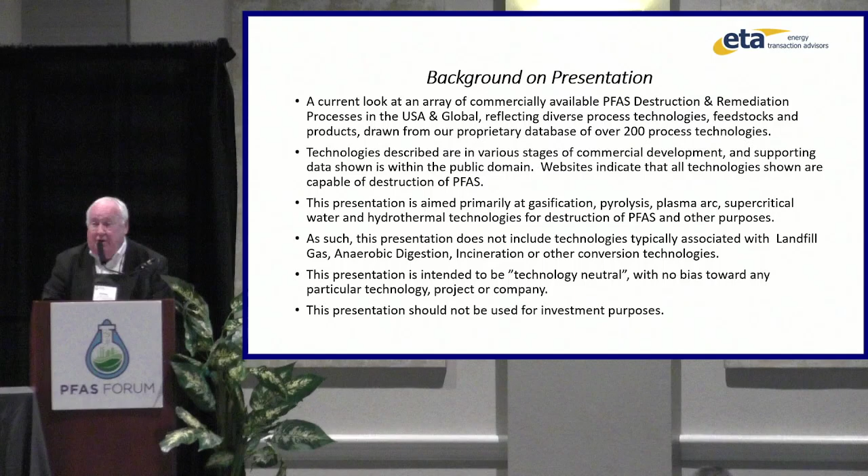Totally unaffected by any differences, and we represent that we are totally objective in our analysis of that. And above all, this presentation should not be used for investment purposes.

ETA is a boutique consultant with a focus currently on waste, biomass, and plastics conversion. Biomass includes things like waste wood and any other plant material, agricultural materials, and ultimately plastics that are typically waste and looking for a disposal method. Effectively, we're focusing on gasification, pyrolysis, and plasma arc. Our key assignments typically are all what I would refer to as due diligence on behalf of either developers or technology suppliers, and we've been very active over the last year in this particular arena.

Just a quick snapshot of the factors globally that are affecting and essentially reshaping the PFAS destruction and remediation marketplace. Without going through all of them, I think you recognize these social, political, and environmental factors, and they represent a component of all the activity tending to push this technology forward. The main one here in the U.S. is recent activity and rulemaking by the Environmental Protection Agency, which I think will have a very profound effect going forward on what happens in this industry.

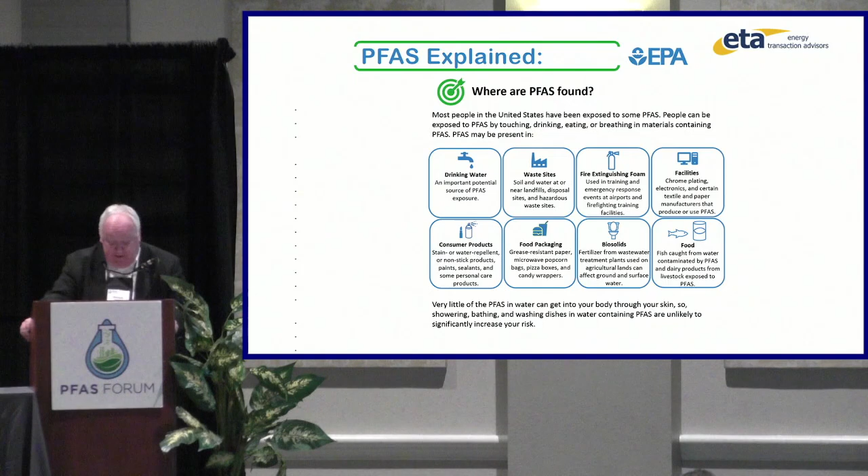And essentially, where are they found? They're found everywhere: air, water, soil, plants, food, industrial plants, packaging, household products, and many others.

And are they safe? I think the clear answer is no, they're not, but the jury is still out in terms of true health consequences.

How did we get into potentially using gasification, pyrolysis, or some of the other technologies rather than the traditional methodology, which is incineration? Most hazardous waste incinerators have operated between 980 and 1200 degrees centigrade, and since the thermal destruction of most organic compounds occurs between 590 and 650 degrees centigrade, I made a simple calculation and said gasification, pyrolysis, whatever, all typically operate well above those ranges, and therefore those technologies should be fully capable of destroying or at least remediating PFAS.

I took a look and developed, from our internal database of over 200 technologies, this list primarily based on the operating temperature of the various technologies. I also looked at the sponsors and participants here offering technologies other than incineration, and they've been added to the list.

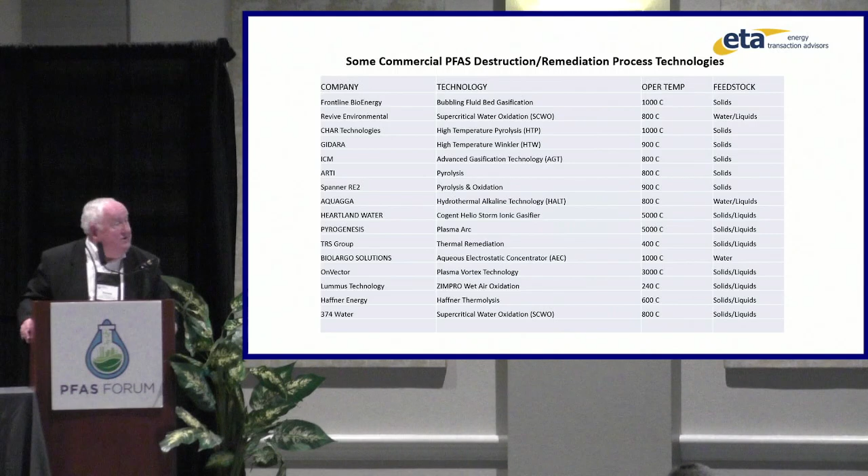Let me say that ETA, Scott, and I are very familiar with about two-thirds of the companies on this list. We talk to them fairly regularly. The other third, as you people in the audience, are relatively new to us, and we'd be happy to expand those relationships, get to know you better, and have you become part of our normal parlance going forward.

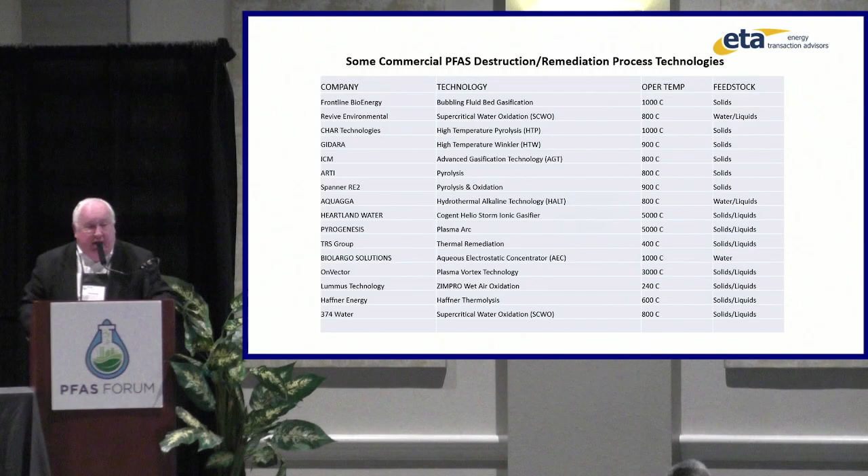At this point, for every technology I've listed, I've got a slide for each, and I'm going to go through those at pretty high speed. You'll be getting a copy of this, so you'll always have an opportunity to do your own research, and I encourage you to do that.

Frontline Bioenergy is basically a fluid bed gasification system, and it has a proprietary gas cleanup system which includes the removal of tars, making them very unique within the gasification space. They have several projects in development, typically large scale, meaning nominally about 1,000 tons a day of feedstock. They're based in Nevada, Iowa.

Virtually all of the gasification and pyrolysis technologies I'm describing have a main purpose that is not to destroy PFAS, but to convert whatever feedstock they're taking into synthesis gas, or syngas, an intermediate vapor that can then be converted into other valuable materials, unlike incineration, which becomes dead-ended at the end of its processing. Gasification and pyrolysis allow you to take syngas and convert it to chemicals like hydrogen, methanol, ammonia, SAF, and also Fischer-Tropsch liquids, allowing you to look at a facility that will not only destroy PFAS but also create a revenue stream depending on what products you're targeting.

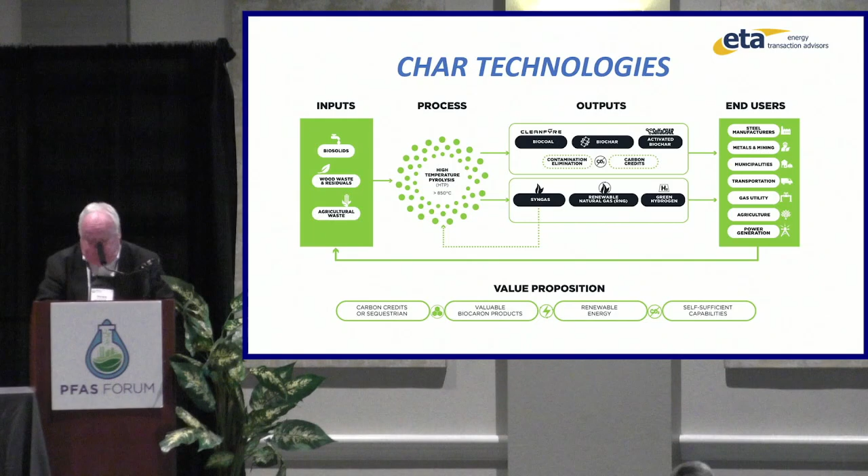GIDARA is high-temperature Winkler. For those of you who've been on the planet for quite a few years, you may remember this technology. It's been around for over 40 years in Germany. It's a bubbling bed, fluid bed, and originally owned by ThyssenKrupp. It was purchased recently, within the last couple of years, by a joint venture of GI Dynamics and ARA Partners. They take solid waste only, headquartered in Atlanta, Georgia, and typically their plants are nominally 1,000 tons a day or larger.

ICM, based in Colwich, Kansas, Advanced Gasification Technology, acronym AGT. They have a portfolio of commercial projects operating typically on waste wood or agricultural waste, and essentially do solid waste conversion, but their operating characteristics suggest they should be able to destroy PFAS. Their plant size is a little lower than many, nominally about 250 tons a day of feedstock as their sweet spot.

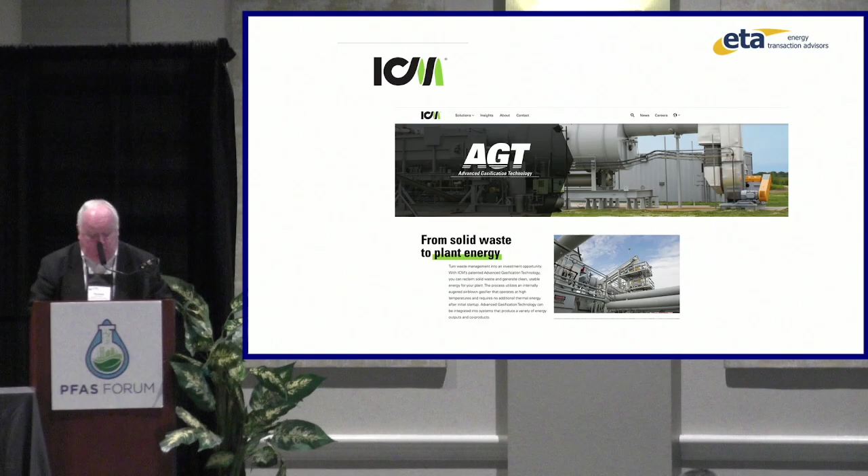ARTI, based in Des Moines, Iowa. It's essentially a pyrolysis system designed primarily to maximize the production of biochar. Biochar is a very popular product now in the marketplace. It has special attributes good for the agricultural industry and mostly for home gardeners. You'll see that industry grow, I think, in the near term. They have a modular system that can fit on a rail car, and they'll deliver it to the site. It's small scale, generally in the range of 5 to 10 tons a day, and they replicate trains to match up with larger sizes.

In Germany, Spanner RE2 offers a biomass power plant. That's all their units do. They do produce a syngas, but it's of a quality only suitable for power generation. Here again, they offer modular units only and solids only.

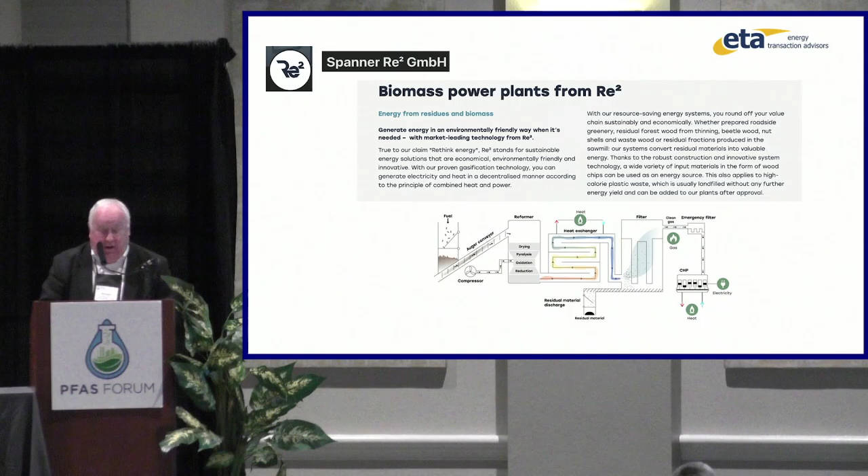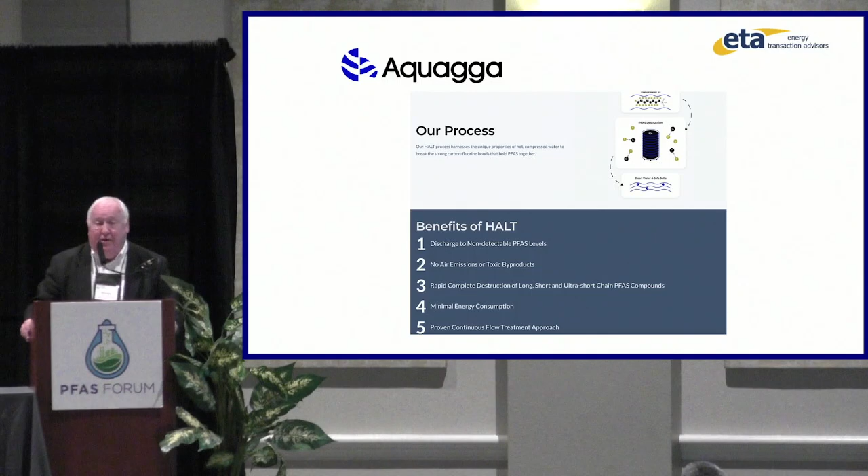This is a new company I'm not familiar with, Aquagga, I believe - forgive me if I'm not pronouncing it right. They're based in Tacoma, Washington. They offer a hydrothermal alkaline technology, HALT process. It appears suitable for liquids only, and I don't know much more about them. If they're in the audience here, I'd be more than happy at some point to learn more about you.

Heartland Water Technology, based in Murfreesboro, Tennessee - their main business is water treatment of all kinds. They have the Helio Storm ultra-high temperature ionic gasifier, and they offer treatment of both solids and liquids.

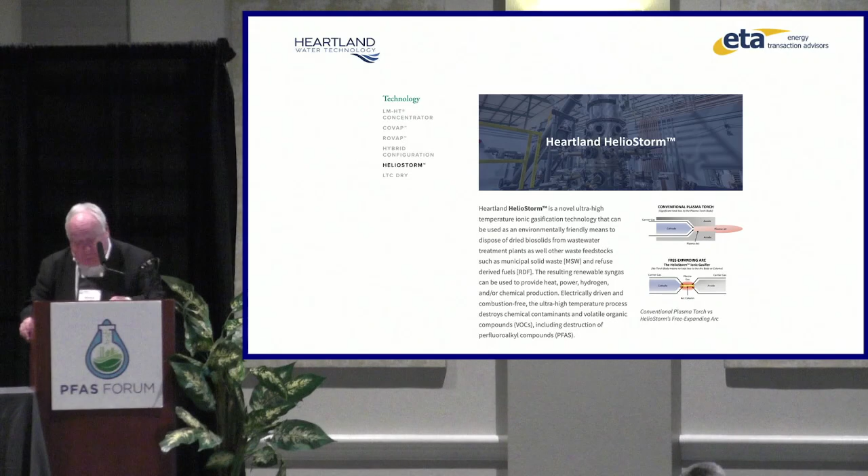PyroGenesis, based in Quebec, Canada, offers a plasma resource recovery system, acronym PRRS, and they have a full system from feed prep, gasification, and vitrification, syngas cleaning, and energy generation. Again, they look at handling both solids and liquids.

TRS Group in Longview, Washington offers thermal remediation and PFAS removal. They offer basically treatment of soils and water.

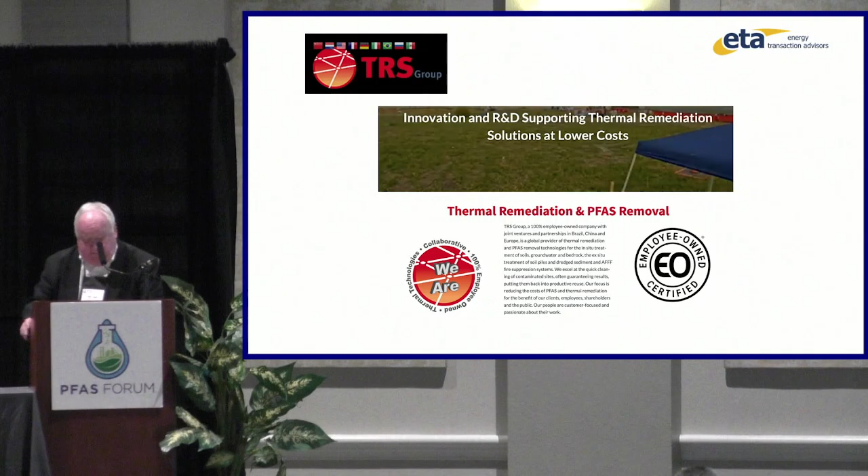BioLargo - I think these folks are here at the conference, I haven't met them yet - but they are based in Westminster, California, and are comprised of a group of several clean tech specialty companies. They offer in this arena the aqueous electrostatic concentrator, which can handle both soil and liquids.

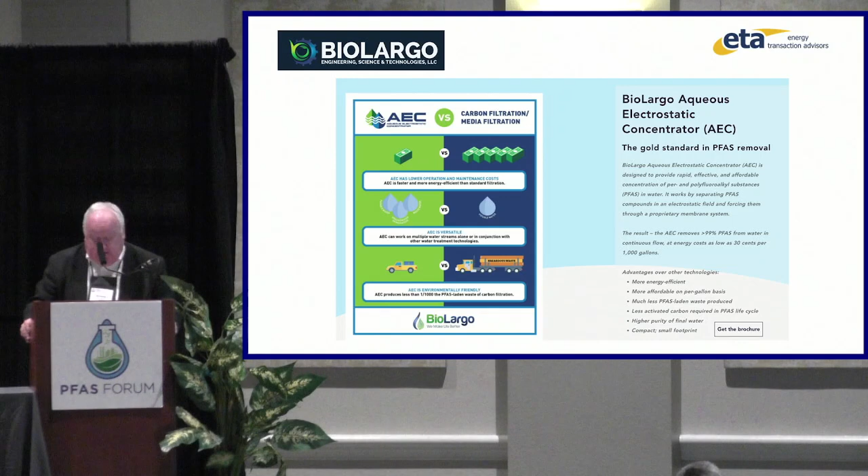Lummus Technology, based in Houston, Texas, my old alma mater years ago. They have a large portfolio of process technologies related to the refining and petrochemical business, and recently purchased the Zimpro wet air oxidation technology, which will take wastewater and other liquids and upgrade them accordingly, and it appears they can handle PFAS as well.

374 Water, based in Durham, North Carolina, uses the air supercritical water oxidation process, and again, they were aimed specifically at wastewater treatment, and that includes PFAS.

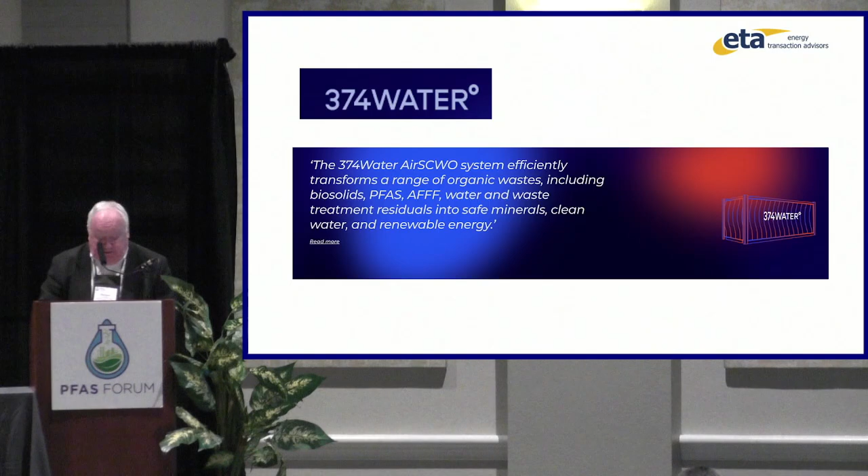And then finally, just to remind you who we are - our main chore in this industry for the last year and a half has been due diligence, and it keeps us very busy, and along the way we learn a lot. I think what distinguishes us is we're very granular in what we do, despite the rather simplistic presentation I've made you with regard to these technologies.

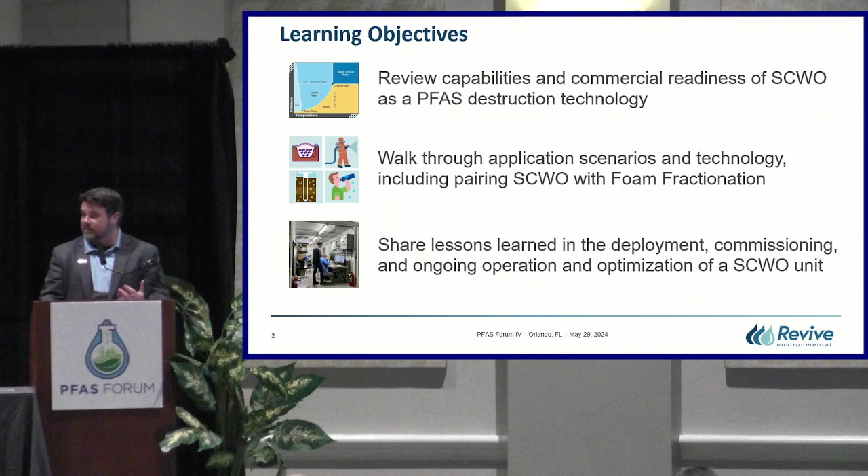Revive Environmental, I was thinking I would have to explain who Battelle is, but there's been good talk about Battelle already. We are actually a spin-out of Battelle. About 10 years ago, Battelle got big into PFAS. They still have many parts of this platform they developed, but one pillar was destruction. Once they got those technologies to the point that they were ready to be commercialized, good on Battelle, they said, that's not what we do well. Let's bring in dollars, form a separate entity, and have a company focused on commercialization.

So we were formed at the end of 2022, and in March of '23, we commercialized our first unit. Now we've got 7 units total, and we have 2 facilities. So really a good model. And we have the added benefit of, Steve Rosansky's in the audience, one of my colleagues from Battelle, we get to reach back and use that expertise that was there developing the technology as we try to further advance it, and do this in a commercial atmosphere.

They said to be patient as you click it. Is it embedded video? Nope, no video. Let me see. Boop.

So I won't spend a lot of time teeing up the PFAS issue. The one piece I'd focus on here is just the persistence, right? We keep putting more and more into the environment. It's staying there. We're looking at destruction as a means to try to break part of that cycle.

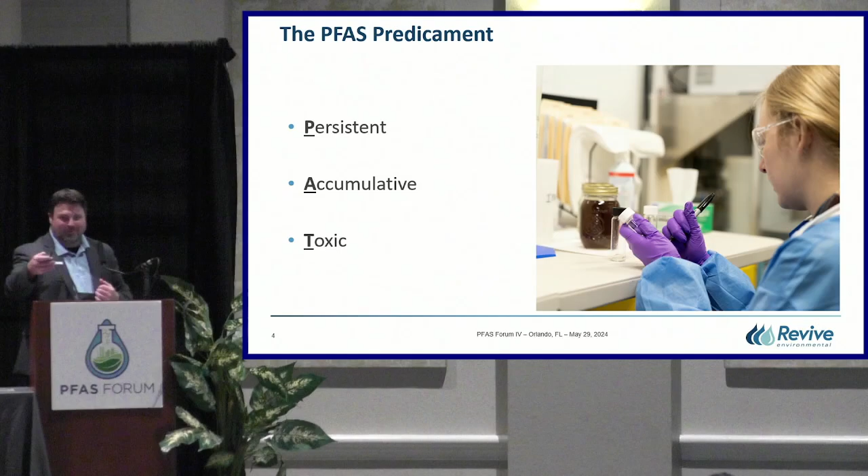Just to bear with me with these clicks. Okay. There

You hear so much about it, like today, about how overwhelming this is. Wherever you look, you're going to find it. And so this feels like a problem where you almost wonder, what's the sense of us addressing this? If all we're going to do is take PFAS out of water or out of waste and put it somewhere else, it's right to feel like that. But this is where we see PFAS destruction playing a role.

We know that the goals we have to get to are really, really daunting. You've heard plenty of folks walk you through what these requirements are. I'd like to talk you through some of the math. If we look at something like AFFF, aqueous film forming foam, these firefighting foams, there's a lot of PFAS in there. Very, very high concentrations. You could be in the millions of parts per trillion. So the math is, how do you go from millions of parts per trillion down to single digits or non-detect? You need a lot of destruction, 6 nines of destruction. As you look at technologies and the applications where you're looking to use them, you do need to ask that question, what is that target that I'm aiming for?

What's my starting position? And what does that technology need to be able to do to get me where I need to be? There's another aspect you'll look at there, for which PFAS, right? We've talked about 15,000 different PFAS, and we know which ones are regulated today. So how does it do it for what you're targeting? And, preview, I'll be talking about how SCWO actually does achieve that level.

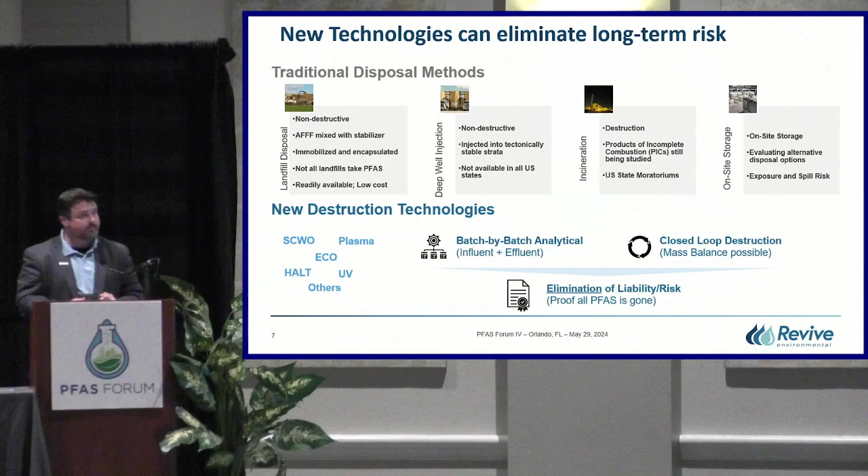So, supercritical water oxidation. In short, you may have always heard of 3 phases of matter. I think there's really like 7, but we say the 4th state of matter is the supercritical. At very high temperatures, very high pressures, water acts different.

What's important for us in this state is that all the organics in that water, including PFAS, are going to be fully dissolved. And as they're fully dissolved, when we introduce our oxygen source, in our case hydrogen peroxide, we're able to get that mineralization reaction to take place.

It ends up being pretty simple in terms of what comes out the other end: a lot of clean water. I'll talk to you about how we've deployed this commercially, how we permitted it. Many of our permit standards are drinking water standards, so we process wastewater and push out water that complies with drinking water standards.

And then we have salts like sodium fluoride in your toothpaste and water, and then a nominal amount of CO2. That's all that comes from the process, and what I'll share with you is just how complete this is.

You may say, well, what about some of the long PFAS? They turn to short, et cetera. The short answer is no. We're doing that for all PFAS, and we're getting that level of up to 6 nines of destruction, so getting us to the non-detect.

So when we heard about the EPA's guidance on destruction, someone said earlier that there wasn't a lot new in it about destruction. There was something new in there. It was a framework for clients and others to really evaluate destruction technologies, because there are so many out there, it's confusing. The EPA laid out these 6 criteria, and we were very happy to see that we had already got all those criteria checked off since we had launched this product.

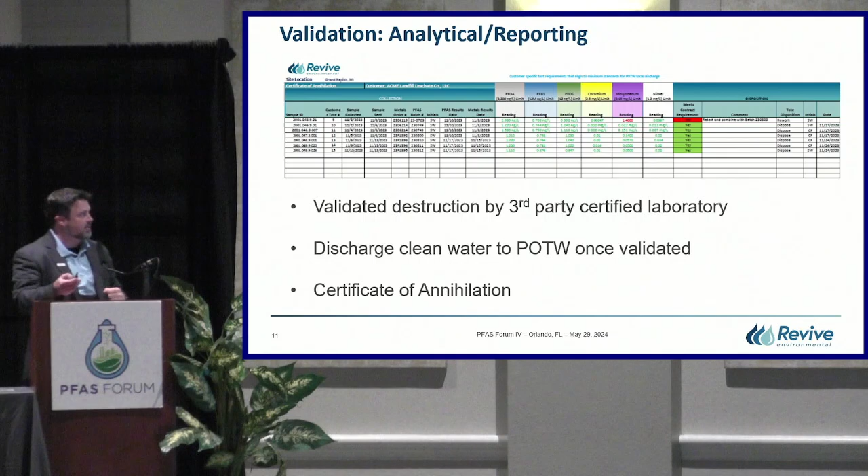Our setup here right now in terms of applications is landfill leachate. Very common - we're having a lot of landfills reach out to us, and there are landfills being pushed by their POTWs saying you better come up with a plan, you can't send us any more PFAS. They're working with us. Industrial wastewater - there's different companies who, whether intentionally or incidentally, have PFAS in their wastewater and want treatment there. AFFF we talked about, and groundwater is an area we're starting to get into.

The big thing to call out here is there's really two modes in which we operate. If we're dealing with a dilute waste stream - and for a lot of these destruction technologies there will be a similar paradigm -

we will concentrate it. So foam fractionation is a popular way to concentrate, GAC is a way to do that. We actually have a technology called GAC Renew, also from Battelle, that pulls PFAS off of the GAC while it's still in the tank, to give something concentrated to put through our system. For the foams, there's so much PFAS you don't need to concentrate it, so we can throw that directly into our system. So dilute waste streams we concentrate, others that are not dilute we process directly.

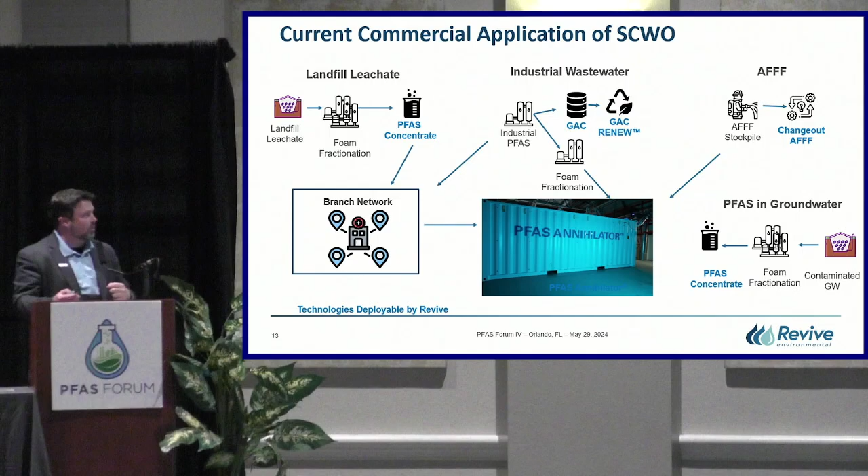As I shared, we've been doing this since March of '23. Last year we treated 55 million gallons of these different types of liquids, and all of that has been verified as meeting discharge requirements when we do that.

We've been establishing facilities - we've now got one in Columbus, Ohio, with 3 of our PFAS annihilators there. It's fully permitted with the state, so Ohio's thrilled they can send their foam there and have it destroyed in-state. We also have a facility in Michigan, and as I'll show, we plan on having others in other areas. We do deploy these as needed to customer sites.

I'll put the caveat that while I like you to think mobile, this isn't us driving to one site this week and another site next week. If you're going to put it there, you're wanting to think about this being probably months worth of time that it's at a site if you really need it there on a temporary basis.

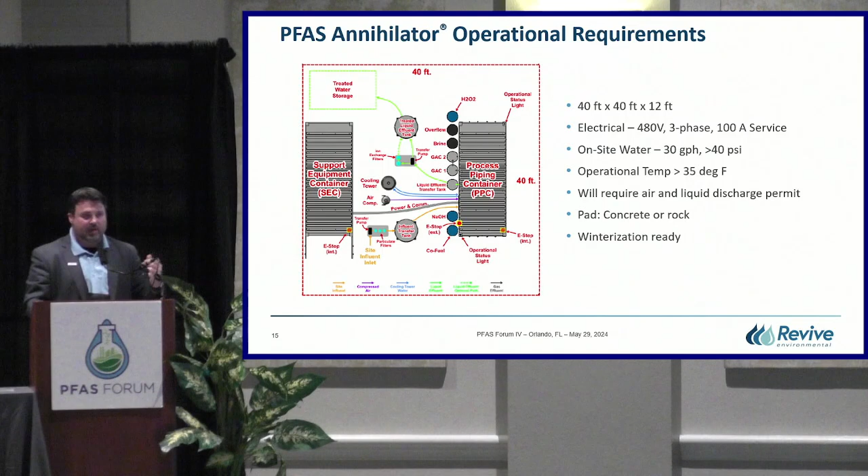What's important to call out is, again, we take dirty water in, and when the clean comes out, we measure that. So once the clean water is coming out of that right-hand trailer, the PPC, that's when we're taking our samples to do our analytical validation. After that point, it goes through some fail stops of GAC and IX for metals. We also have vapor, where we hardly get any vapor - we need to put a vacuum on it. We have air permits by exemption, but still we have a vapor GAC on that. So we ensure that nothing is getting into the environment from this, and we're doing that validation every time before we do a discharge.

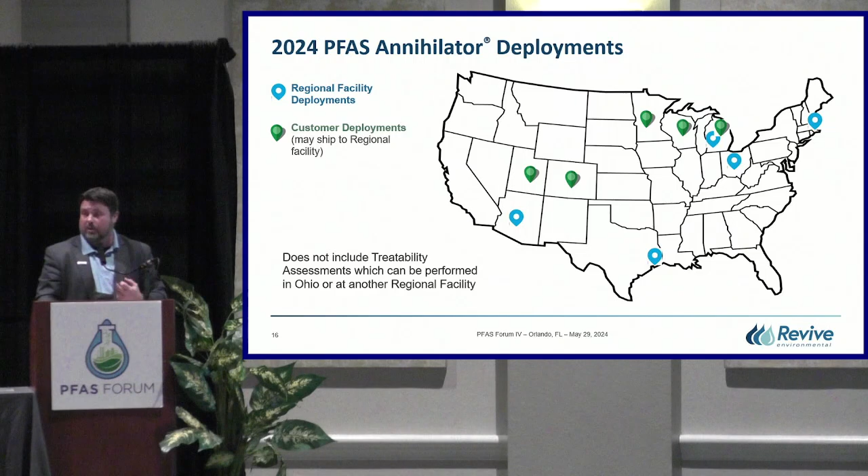So we're expanding these to basically have it close to our customers. Many of the folks we're working with, particularly with these concentration technologies I'll talk about, just don't have enough volume to fill up one of these units. So we look at how we might concentrate on their site and then bring it to us centrally. But we know there are other customers who will not want to put their waste on the road - maybe they have concerns about that, or they have a large enough recurring need for us to deploy to their site.

So I don't think foam fractionation was talked about so far today. I'm curious, how many of you know what that is? Okay, good number. For those who don't, think about an aquarium with fish that bubbled up. The bubbles weren't so much about air for the fish, it was actually helping keep it clean. Some of the organics in that water would stick to the bubbles, since there's a hydrophilic and hydrophobic end, they stick to those bubbles and come up.

Fortunately, that's exactly what PFAS do. They're able to stick to these bubbles, those bubbles go up and form a foam, and the key to it is how do you then take that foam and make it smaller and smaller. So you're able to discharge clean water from this system but have a really concentrated waste at the end.

I will say this has limitations though. What we've seen is that with really short or ultra short chain PFAS, they do not stick to the bubbles as easily. There are ways different vendors are getting around that, like different additives they can put in to help with that collection, or different ways to run parameters or other treatment equipment to bring in with that. But if you have a client with a very high, for instance, PFBS problem, this may provide somewhat of a solution, but you may have to look to other technologies to help out.

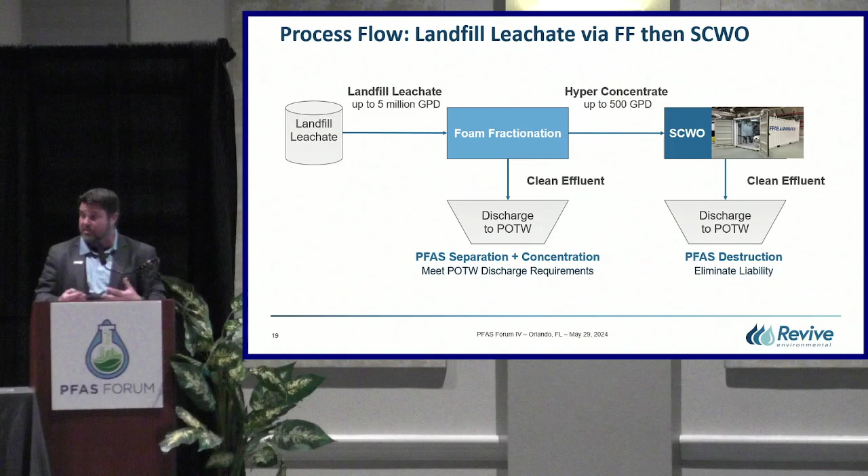And when I show you more about AFFF, the firefighting foams, you'll see very similar results.

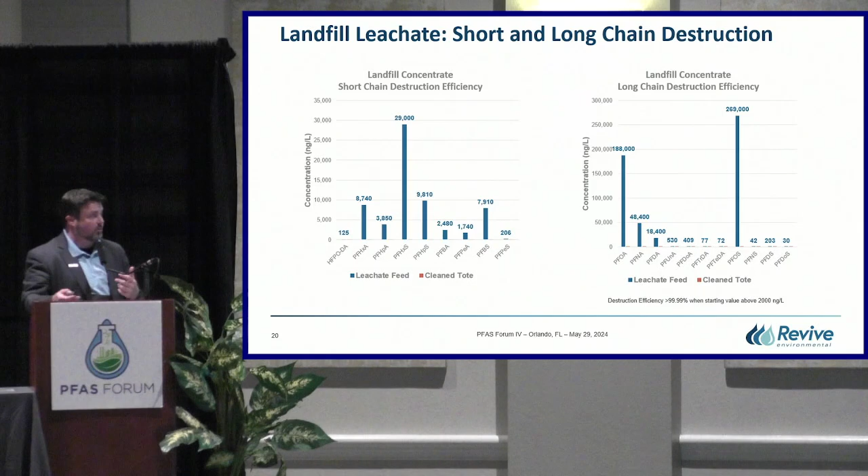There was a little bit of discussion today about that transition to fluorine-free. I tell you, that's probably where a lot of our business is coming from today. We certainly have a lot of landfills and industrial customers, but it's really been a lot of airports and states who are saying, we want to get out of this stuff, let's transition. Not everybody's ready to do that, but there's been a very strong demand to do so.

As they're thinking about that transition, a huge part of it is, what do I do with my waste? Whether the waste is the AFFF still in my closet, the rinse water from cleaning out my system, or maybe an entire system where I want to just start new and throw this one away. They have to really keep that in mind to be efficient.

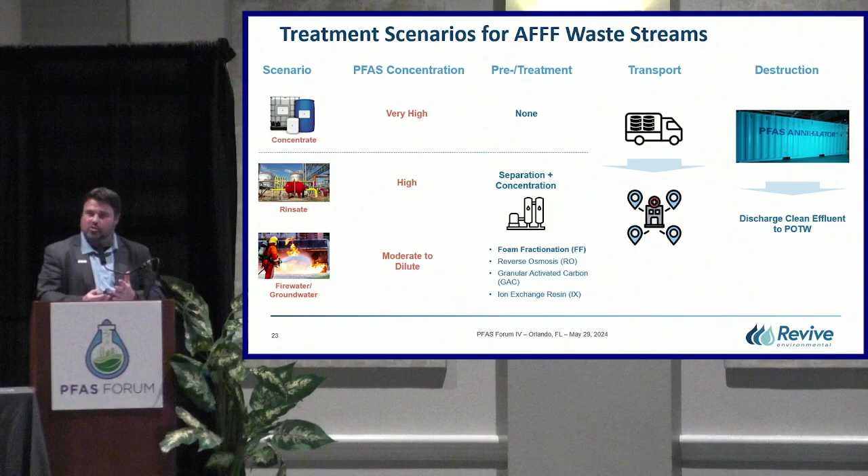What we've seen is either we're getting something very concentrated, like these foams, and for us that's very straightforward, we just put it through our annihilator and destroy it. We actually have t-shirts that say, I love annihilating AFFF, because it almost works like a lubricant for the machines, very good. But then we have these dilute waste streams as well, where it's really the same idea, we just want to concentrate them, foam frac or something else, and get a concentrated waste stream to go in.

So really, lessons learned here. First and foremost, we at Revive operate these units as a service. We don't sell units and tell clients, here's how you need to learn to use this, etc. There are some destruction technologies that do that, but ours is about a service.

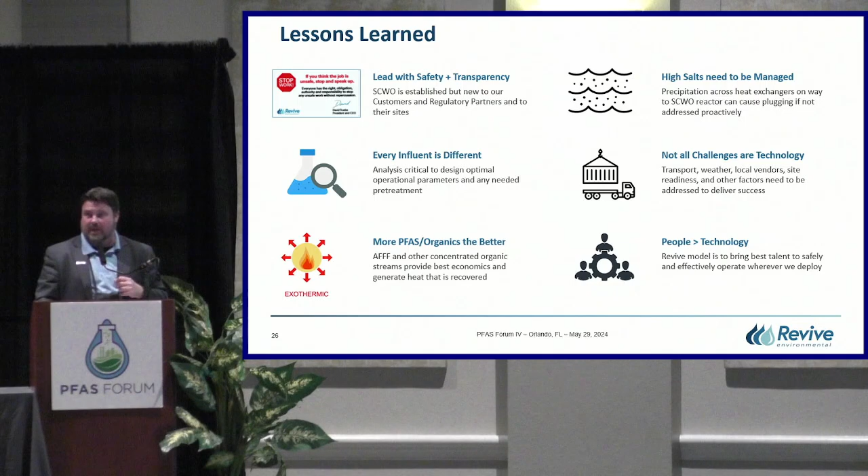Those are kind of things you get to experience as you're doing that. We're building a recipe book, and we're finding out how to best operate in different situations.

Hopefully I've been able to share with you a specific PFAS destruction technology that is ready today and how that matches up with other technologies. For any of the destruction technologies you're looking at, try to figure out what makes that technology most economical. For many of them, it probably will be concentrating.

And really what we've learned in running these sites, we're not doing pilots, we're not doing trials, we are doing this commercially, seeing that so many wastes are different, and that really does have an impact on what we can do. So we're very much having to learn as we go through each one, how we can efficiently destroy, and then how we can achieve the results that our client wants.

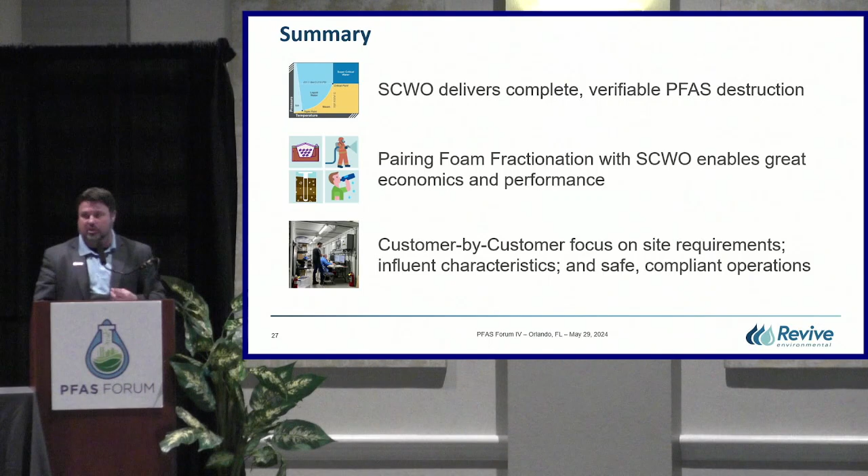All right, thank you, Trevor. So it's a little mind-boggling that in a few years we went from parts per million to parts per trillion, and we're like, oh, six orders of magnitude reduction, no problem, we got this.

It's kind of blowing my mind, but our next presenter is a former colleague of mine at REGENESIS, and I didn't even have to ask this fun fact. She is quite the equestrian. She learned how to ride as an adult and competes now some, right? And wins some, maybe, once in a while? Okay, once in a while. So Maureen Dooley is going to take us from the surface to the subsurface. Great, thanks.

Hi, how's everybody doing? We're getting there. We're so close, so close to happy hour. But yes, I had the opportunity to work with Chad for a number of years. Fantastic person, fantastic scientist, presenter. So anyway, I appreciate it, thank you, Chad.

So, PFAS remediation. One thing I found really interesting today is that we've had this thread of airports running through the entire presentation. We had AFFF transitions, talking about liability, talking about funding, getting into forensics, really interesting data analysis, and I think our friends at the airports have some issues that they need to deal with.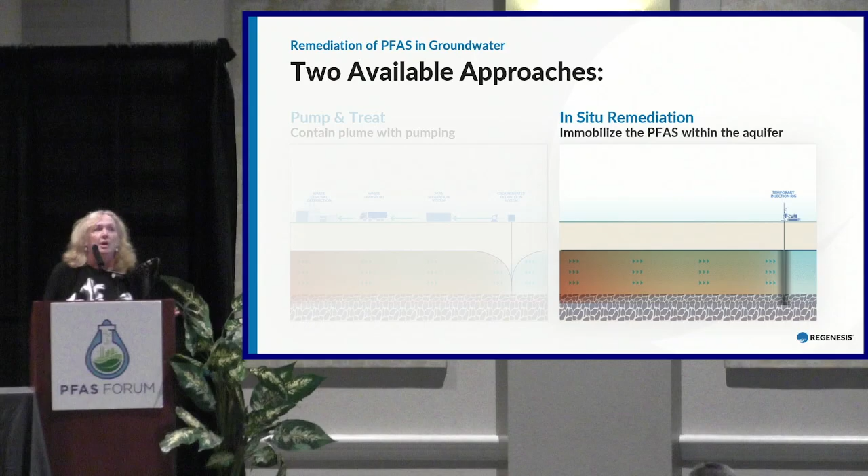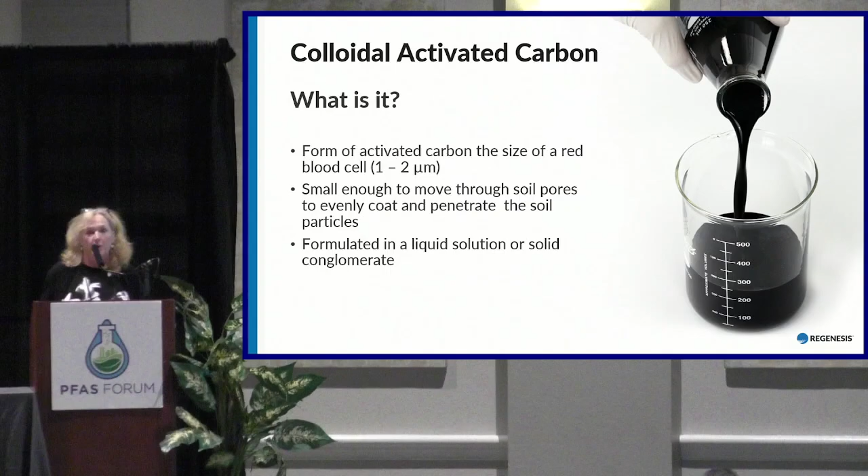So what I'm going to talk about is the methodology used to stabilize PFAS in situ to address groundwater. What we're using is a colloidal activated carbon. You take activated carbon, mill that down to 1 to 2 microns, then suspend it in a polymer that allows this colloidal activated carbon to be injected under low pressure and get distribution - we're not going to have any hydraulic changes. We actually have 2 formulations now: a liquid and a solid. So it's a source stop and plume stop.

So how is the remediation achieved? I know there's a question about where it is, what's happening, and how long. What we're doing is having these colloidal activated carbon particles coat the soil, creating a carbon filter underground. So as groundwater with PFAS moves through this zone, the PFAS sorbs onto this colloidal carbon, and you have clean water moving to the other side. It's simple, really. The challenge is ensuring you have the distribution and get this colloidal carbon where it needs to be, with sufficient quantities to manage what's coming into your system or barrier, looking at a barrier design.

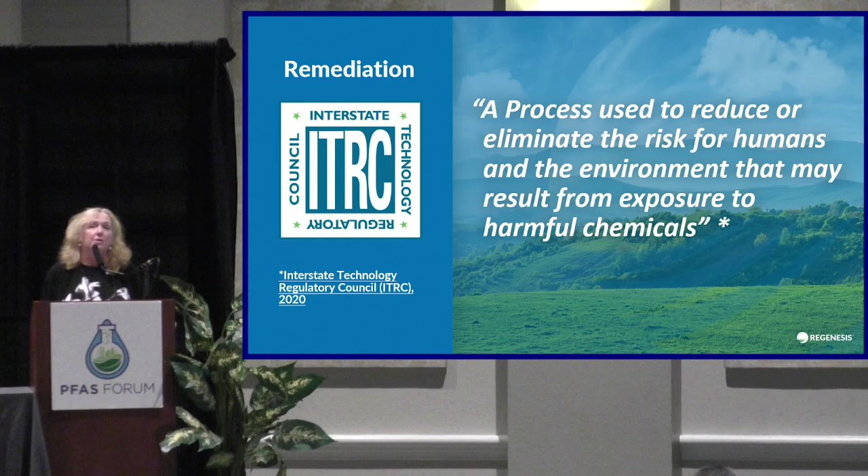People talk about remediation, and we like to point this out from ITRC - it doesn't necessarily have to be a destructive technology. What we're really doing in a remediation is managing a risk, eliminating an exposure pathway. For instance, if chromium is stabilized, we don't remove the chromium from the ground. We're able to create a situation where you don't have hexchrome anymore, and you're able to manage that risk and manage that exposure. That's really what we're doing here as well.

So getting to airports and some of the results and information - the big question is, how long does it last? What's our design, what are we trying to do? We're not destroying it, but we're changing the equilibrium of the subsurface, so the flow of the PFAS changes substantially. You're creating, as mentioned in one of the earlier talks, the stabilized zone. So your PFAS levels in groundwater are removed, significantly less, and you can get down to these very low part per trillion levels.

As far as how long it lasts, this depends on your flux, how much contamination there is, and anything else that happens to be present. Because we're pretty familiar with isotherms, we know how much sorbs and what the behavior is, so you're able to model this. In the paper shown here, they looked at 17 different sites with mixed contamination - PHCs, chlorinated solvents, along with PFAS - and were able to document the performance. One of the biggest takeaways was that you can get decades of longevity, like 60, 70 years.

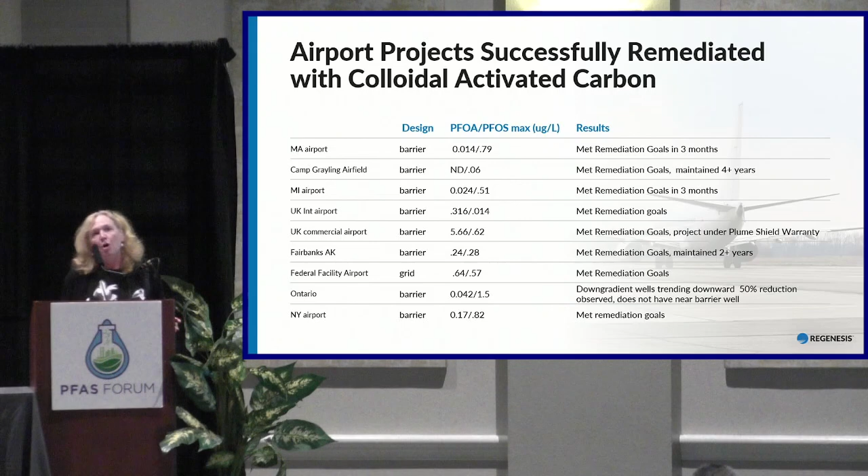Looking at this snapshot of some of the different sites we've had, specific to airport sites, we've been able to meet remediation goals. Some of these were at 70 parts per trillion, but there's a bit of a range. We're definitely at least below 70, in some cases below 20 or below 4 parts per trillion for each of these sites. So the ability to get a rapid response has been shown quite frequently.

I'm going to get into some of the details on how you get into a design, and some project results. The Grayling site is one that we show a bit, but the reason I want to present this is to walk through the process and what's involved in a particular site, and some of the things you're looking at and important characteristics.

So when we get started with a project, what are some of the things we're looking at? We need to really understand what the contaminant mass is. We need to understand the flux. And we also need to understand the vertical distribution. Quite often you can have a 1 or 2 foot zone where most of your groundwater flow is running through. So understanding that allows us to fine tune our design to ensure we're getting the capture that's required.

Non-target compounds, TOC - that's why sometimes a site like a landfill might not be appropriate, because there's just too much other competing contaminants or TOC, and it might not be appropriate for PFAS. So what we're going to look at is carbon dose, vertical distribution, and what's the barrier time length that we expect this to remain viable for.

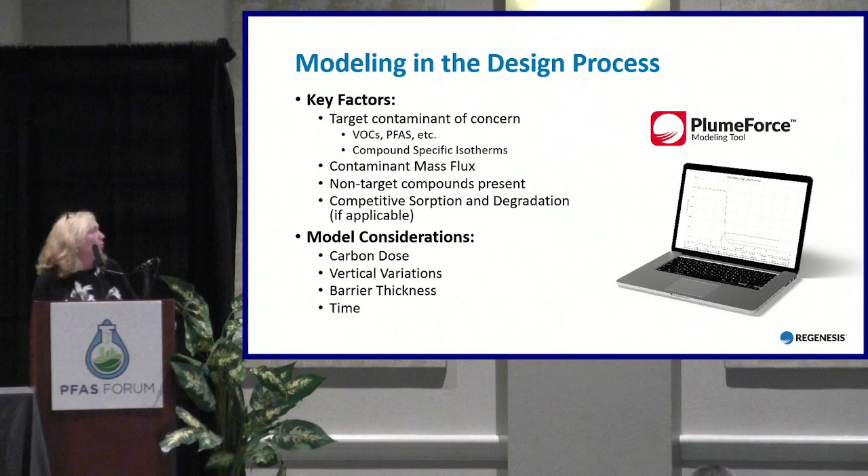So just a simple layout - how is this applied? It's applied through direct push. The numbers 1 through 9 were just the injection points, usually spaced anywhere from 5 to 8 feet apart, depending on the particular site. So it's just in direct push. Please note the pressure - it's just 16 psi, so this is a low pressure injection. Again, it's really critical to make sure we're getting the delivery and distribution.

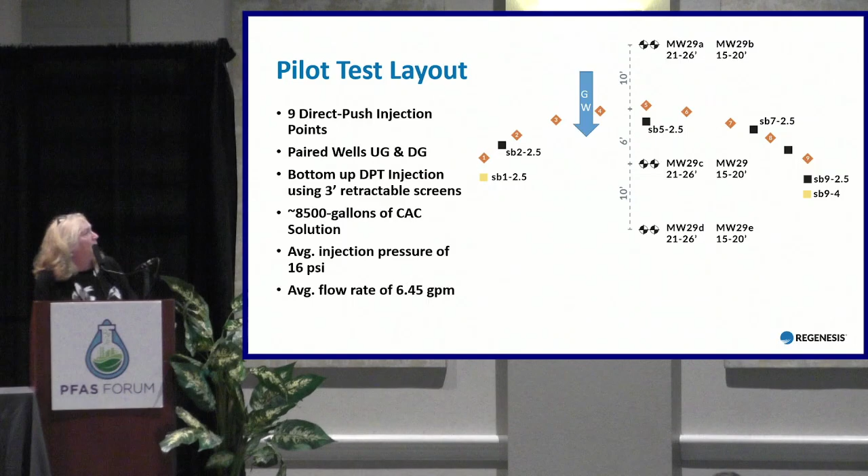Going back, there were two down gradient wells, and I'll come back to that in a bit - you see the 2 down gradient wells at 6 feet and 10 feet. Something else that's really important that we've incorporated in all the field applications is this placement validation.

So we're going to collect groundwater, collect soil cores, along with putting in some piezometers so we can look for evidence of the colloidal carbon, which is a black color. This just shows an example of where we look at that.

So what we're looking for is that distribution over our target zone. In the first picture, you see just the native material. The second picture shows where we were getting some distribution, but we weren't covering the entire area - we made some adjustments, and then we were able to cover the entire vertical zone.

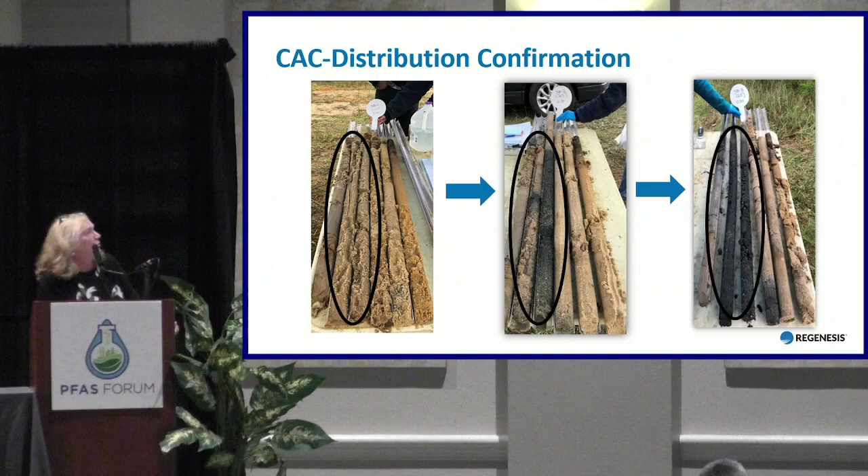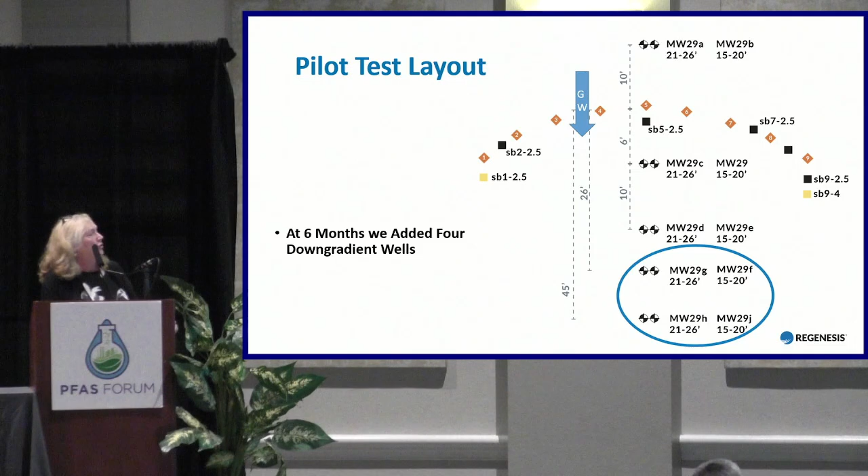So at 6 months, they decided to install 4 additional wells down gradient to be able to monitor, at 26 feet and 45 feet, to see what sort of reductions were being observed.

They also saw that the groundwater flow was actually in a slightly different direction, which happens sometimes. The results show that even in the down gradient wells, when we average all of these, everything was down below reporting limits. So with the new wells installed, we're down to 10 nanograms and 2 nanograms per liter of the PFAS compounds.

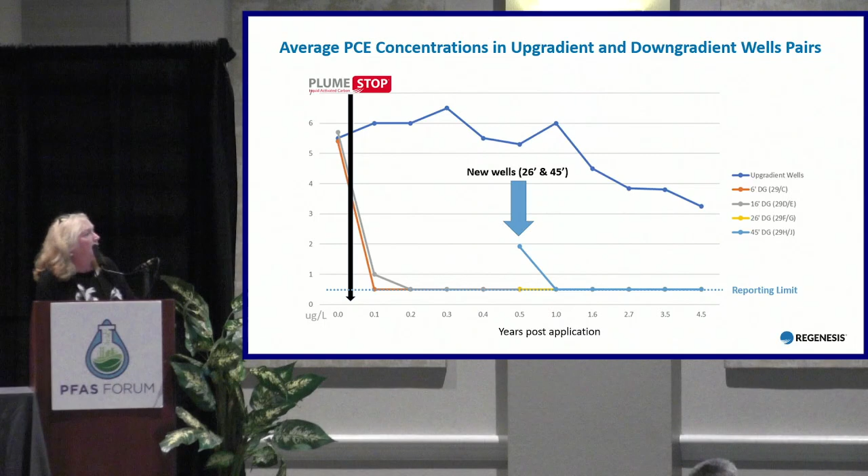We're seeing similar results with the PCE. A question that comes up sometimes is what about hydraulic conductivity? The colloidal carbon is really only about a 10 micron coating over the soil particles, so this just shows some slug tests before and after, with no measurable change.

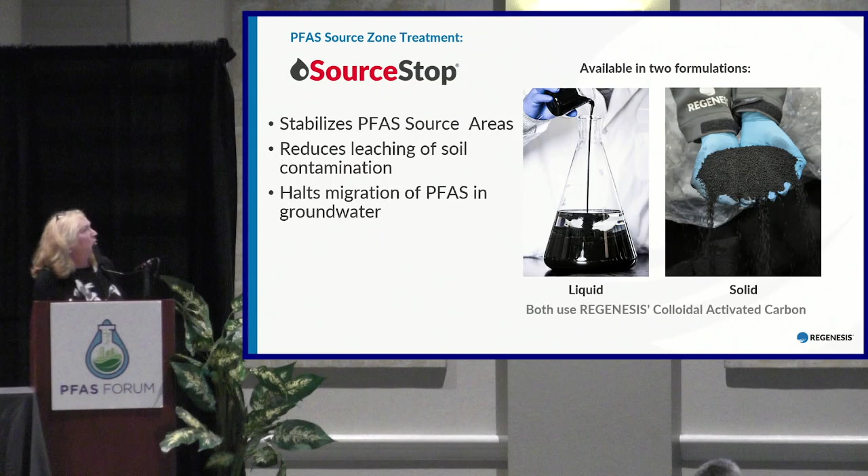So much for PlumeStop - at Grayling itself, we also looked at some soil stabilization. For this particular site, I want to show a new formulation we have: Source Stop, meant for vadose and capillary fringe type applications where things are in higher concentrations. We have the solid form and the liquid. The solid is actually a combination of colloidal activated carbon and GAC.

I don't show the video, but once it's hydrated, the colloidal carbon dissociates, so it allows it to move and get into some of the finer grain material. What those beakers show is 5% GAC versus 5% of the Source Stop.

If you're considering stabilization in those situations, we're looking at reducing leaching. It's not direct exposure, but just reducing leaching to be protective of groundwater. It's likely that you would use less material.

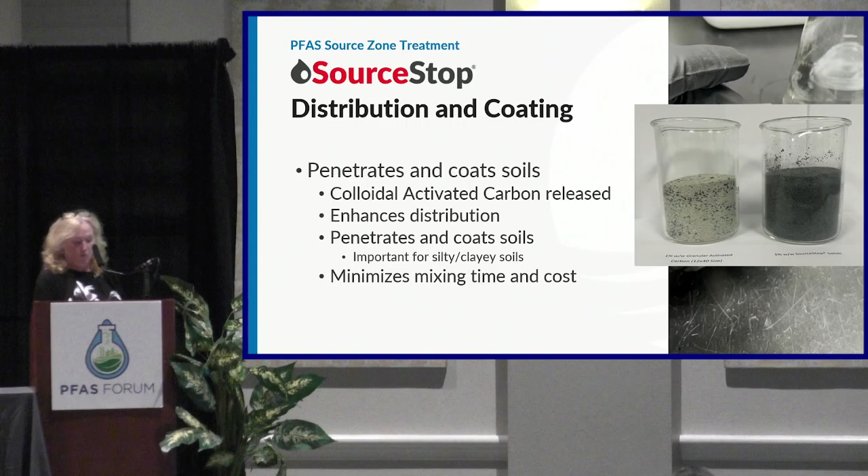For this particular case, we've got 84 cubic yards where we've applied the Source Stop - in this case, it was actually the liquid. Jumping ahead, you can see the results: immediately after post-treatment, the SPLP analysis, and then 6 months later, all the PFAS were non-detect. But I just want to jump in quickly to a couple other sites.

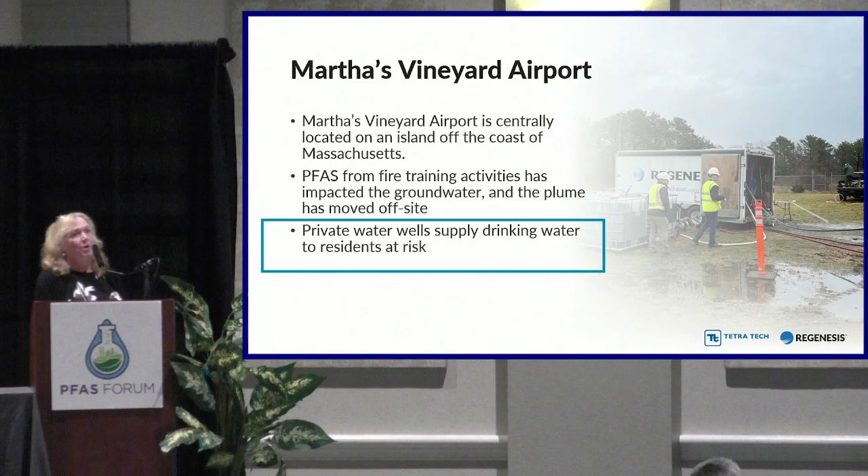So we have the Martha's Vineyard Airport. At this particular site, this is one of those cases that can't wait - they needed to move it along because they were concerned about groundwater moving off site that had the potential to impact residents.

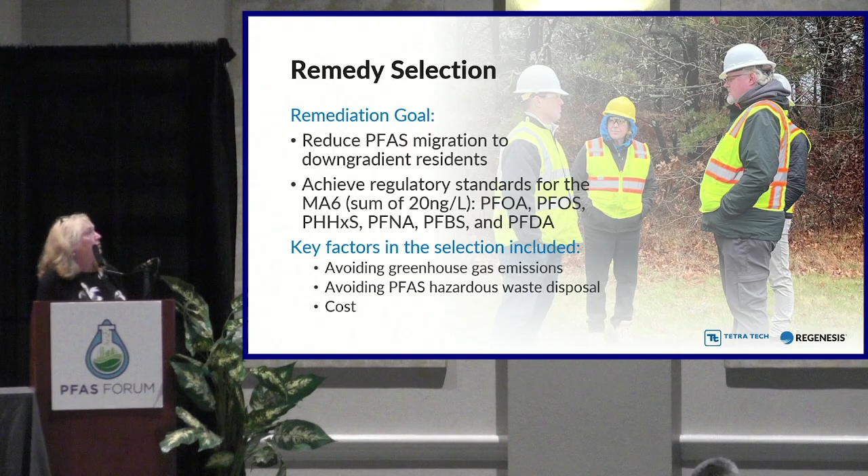Now, when you're on a place like Martha's Vineyard - it's an island - they do not want to manage a lot of waste. They don't want to ship things off the island; it's extremely expensive. So it was really important to keep things on site and manage their liability. In this case, our goal is the sum of Massachusetts 6, so 20 nanograms per liter.

This was an initial phase right down gradient of a fire training area. We had a 60-foot barrier, and we're almost about a year out now looking at the results. If you look at the upper box, you can see the red line - that's where the barrier is.

Typically we'll have a well at the barrier or very near it, so we understand what's happening, because sometimes if that horse got out of the barn, you have variable sites or soils, and you might see differences in response time. So that gives us a real indication of the barrier's performance.

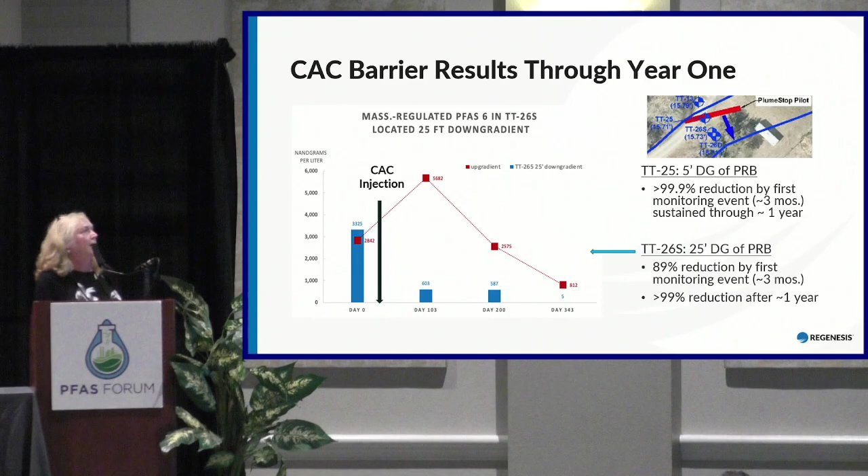The results I'm showing here: the well that was 5 feet from the barrier itself was non-detect after 3 months. The next well, 25 feet down gradient, shows how the PFAS levels dropped, with the last reading at 5 parts per trillion for the combined 6 compounds. The plan at this site is to move ahead with a little bit of soil stabilization - they've got some source material remaining - and then expand the barrier.

Just one last site - again, a similar situation. This is a site in Michigan, a silty sand, so not quite as transmissive as some of the other sites we looked at.

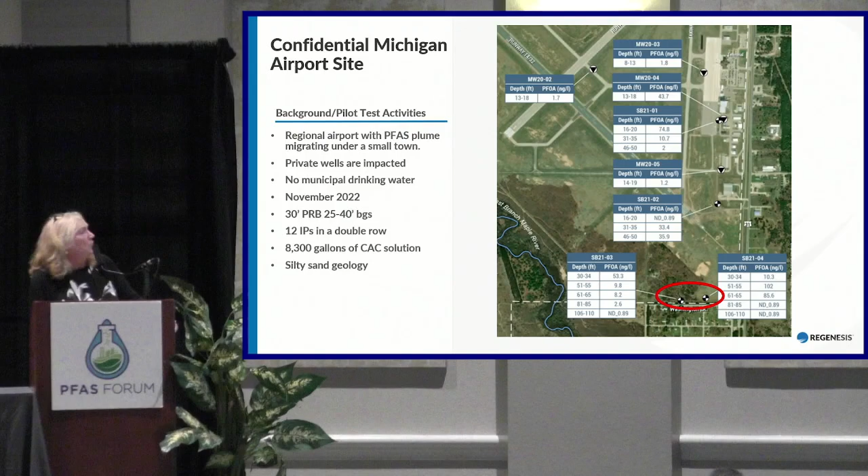This is part of the pilot program taking place in Michigan - a pilot test. Jumping ahead, this is the location where we're looking at some of the key wells. For this particular site, we injected the colloidal activated carbon just within that vertical zone, even though contamination was found to be deeper.

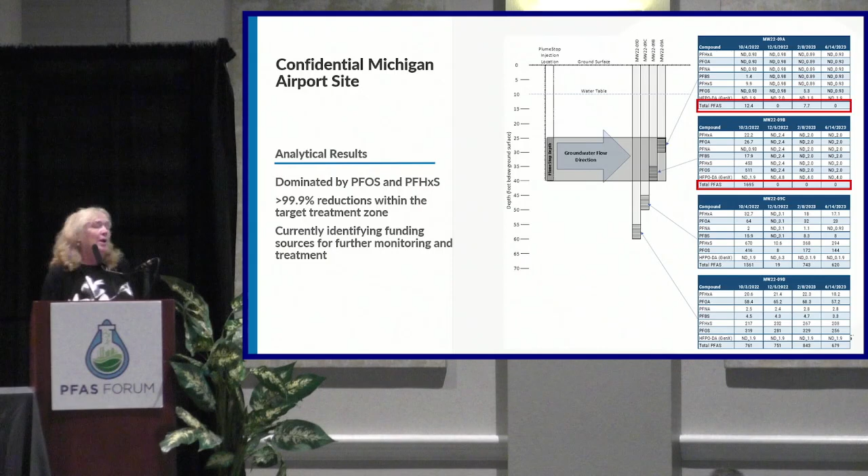And so then we saw very rapid and maintained reduction of the PFAS contamination. And so what they're waiting for is additional funding to come through, hopefully with the state of Michigan, because they have some remediation funding set aside.

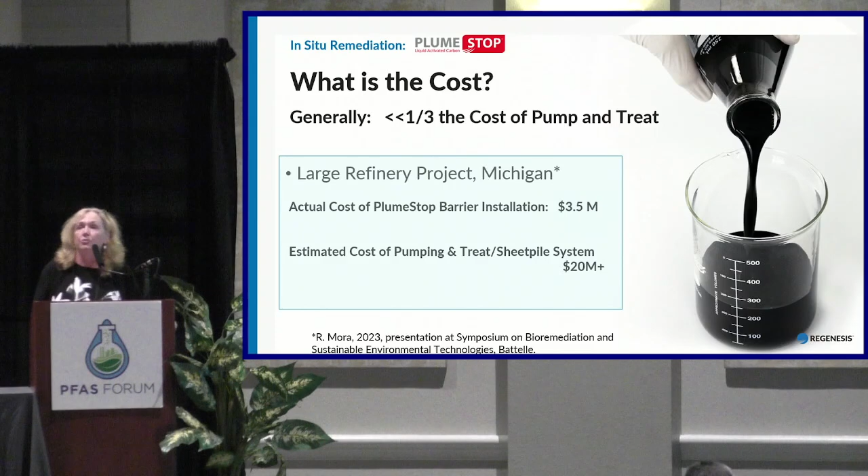Much larger project - this is a full-scale operation that was in Michigan. The PlumeStop installation was about 3.5 million. This was at least 2,000 or 2,500 feet of barrier. The estimated cost there, if you were going to have a pump and treat system with sheet pile, was about 20 million. So you can get a sense of what the cost differential is.

So what we're doing, we've got ongoing research. We're part of SERDP. We've got a couple sites here in Florida. We're at NAS JAX, part of the SERDP demonstration. And there's another location that we've been on, another airfield in Florida as well. So with that, I'd be happy to take questions later.

All right, hello everybody. My name is James, I'm a project engineer with TRS Group, and I'm going to talk to you about another tool in the toolkit for treating PFAS in soils. So we'll start with a little definition and description of what thermal treatment is. We'll talk about a couple of our job sites that we have completed, and then we'll end with a bit of info on site selection and sustainability.

In thermal remediation, TRS will come in and install heating infrastructure in the target treatment volume. That heating infrastructure will heat up the soil, the groundwater, and the contaminants, and it will volatilize some water and contaminants. Those vapors are drawn to the surface where we treat them with different technologies. For PFAS, we're using carbon currently.

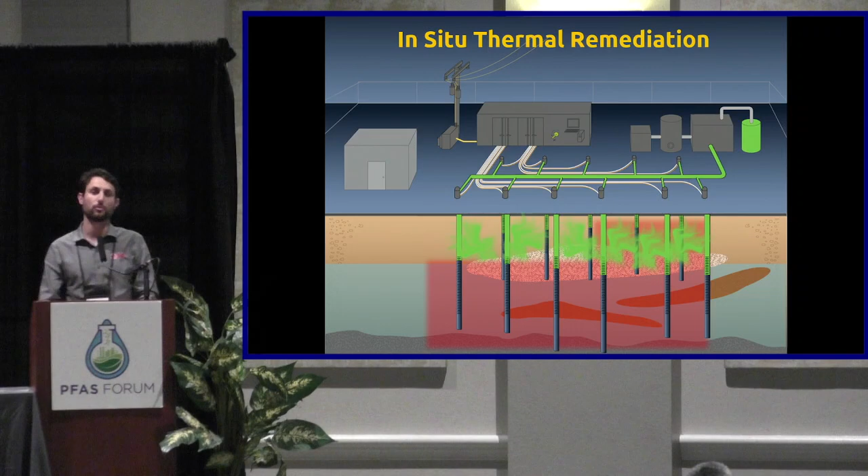Our sites are run with grid utility electricity, so both our heating elements and also our water and vapor treatment are run through grid electricity.

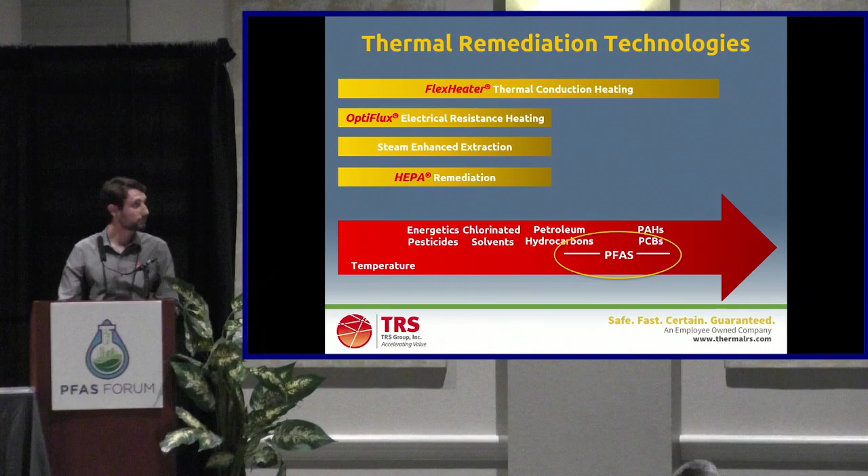At TRS, we've been performing thermal remediations for 24 years. We can treat a variety of contaminants, and we have several different technologies and methods to treat those. You can see on the bottom some of our contaminants that we treat. PFAS is on the higher end of our target treatment temperatures, and for us, that means we're going to be using thermal conduction heating technology. So that is what I will focus on today.

So what does high temperature mean? We went out in 2019 and performed a bench test study to see at what temperature we're able to remove PFAS from soil. One of the things that has been said is that there is no thermal destruction of PFAS in situ, and that is correct - that is not what we are doing. We are desorbing that PFAS from the soil so that we can draw it to the surface and concentrate it there. So about 350 or 400 degrees Celsius is where we're seeing really great reductions of PFAS in the soil.

So we're able to use this information from our bench test studies to inform our temperatures at some of the sites that we've done. The two sites we've completed are ESTCP sites, one up in Fairbanks, Alaska, and one just north of Sacramento, California. The picture here is from Anchorage, Alaska, where we have a site that is just starting up, and I will give a little preview of that in a bit.

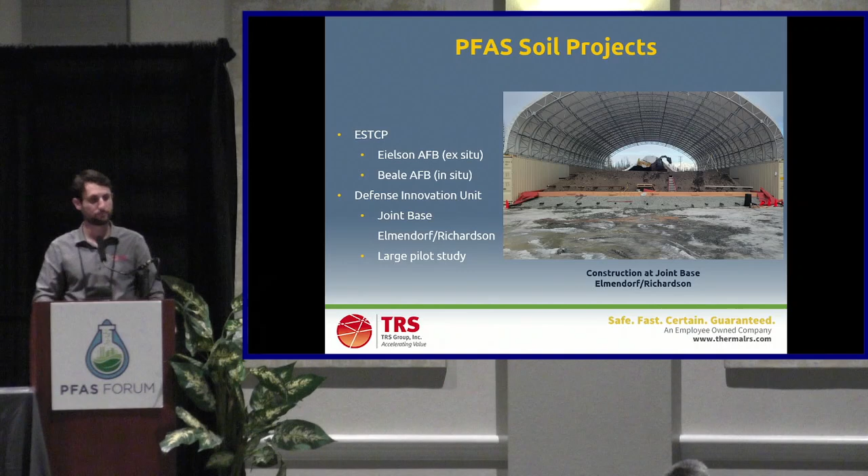So at Eielson Air Force Base in Fairbanks, Alaska, we had a small ex situ pile that was already in place. We actually did not manipulate this pile - we treated it in place. Some moderate concentrations of 62 micrograms per kilogram of PFOS to start.

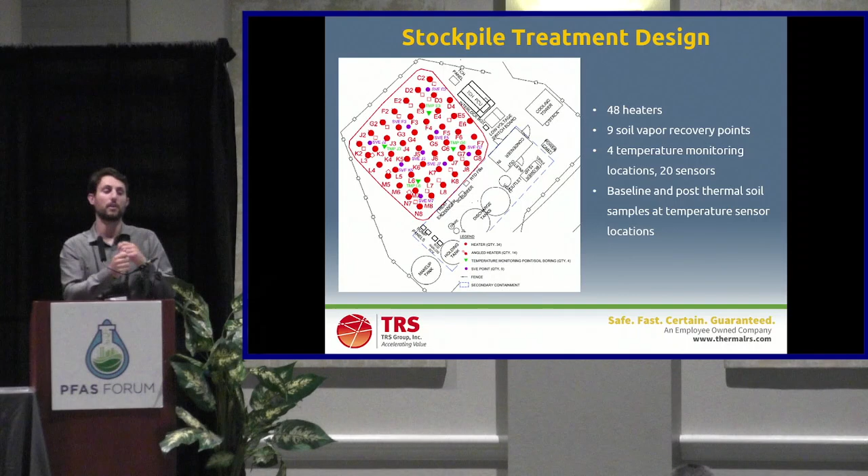The other thing is at each point where we have a temperature sensor, we're also doing our baseline and post-soil samples so that we can compare the temperatures that we achieve to our reductions in PFAS.

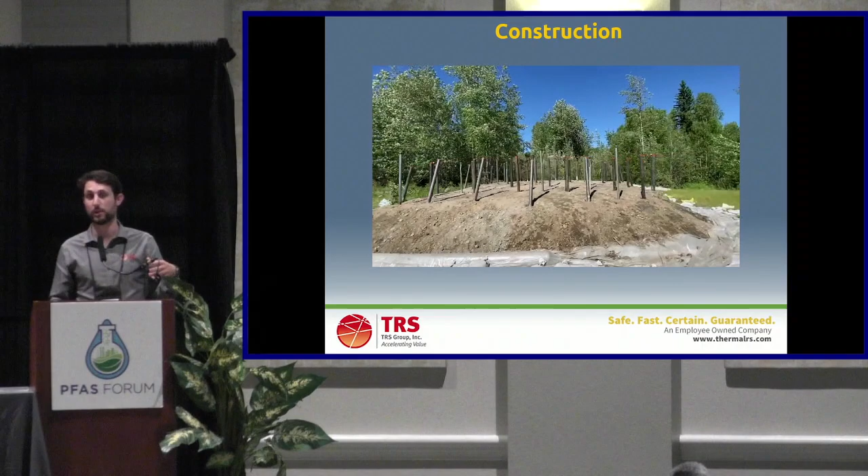So this is a little video that gives a good three-dimensional understanding of what we're doing. 48 of those casings are going to hold our heaters, and inside those heaters are specific alloys of heating wire that function just like your toaster does.

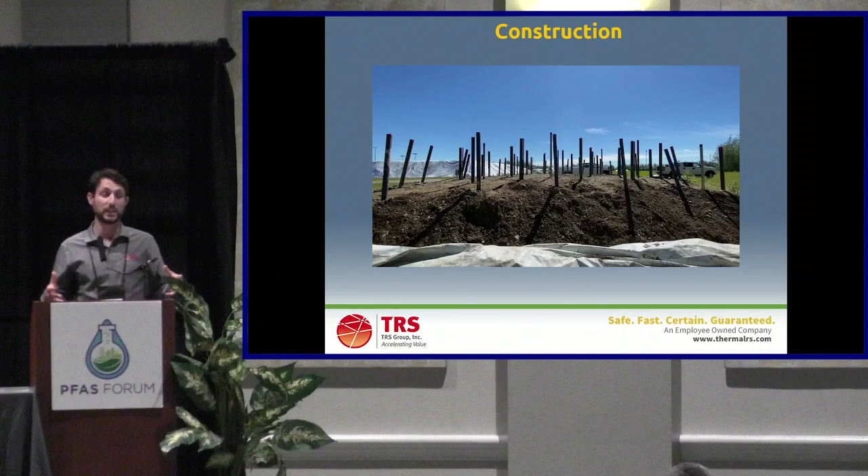So those red wires in your toaster and our heaters have electricity run through them where they heat up. And the heat from our heaters will radiate out to these casings, and it will continue to conduct out into the soil until those heat fronts connect at the coolest points where our temperature sensors are.

As we continue construction, one of the most important parts of our build is high temperature insulation. So 300, 400 degrees Celsius is very hot. We have a specific type of rock wool insulation that we use for our sites. And that's going to reduce the amount of energy that we need to input in the soil, reduce our resource load. And it's also going to make sure that every bit of soil reaches temperature.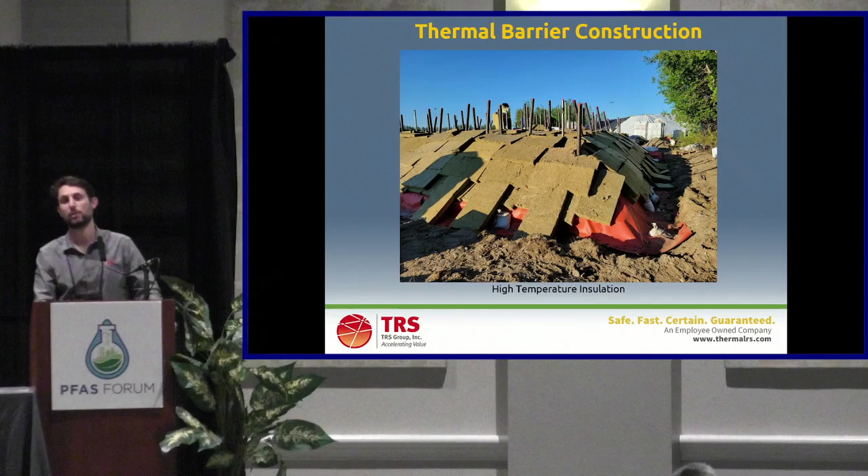So to protect this important insulation, we'll put at least one layer of liner on top to keep it dry and make sure that stays functional.

So here's a completed site. You can see on the back right, we have a tent also over that treatment pile that's going to help protect it from the elements. You can see we treated into the winter here in Alaska, and we use that to also allow us to have a working area around our pile.

In the front here, you'll see some of our power distribution equipment. The switchgear is connected to the utility power from the base, and our power control unit allows us to direct electrical energy to certain parts of the pile as needed.

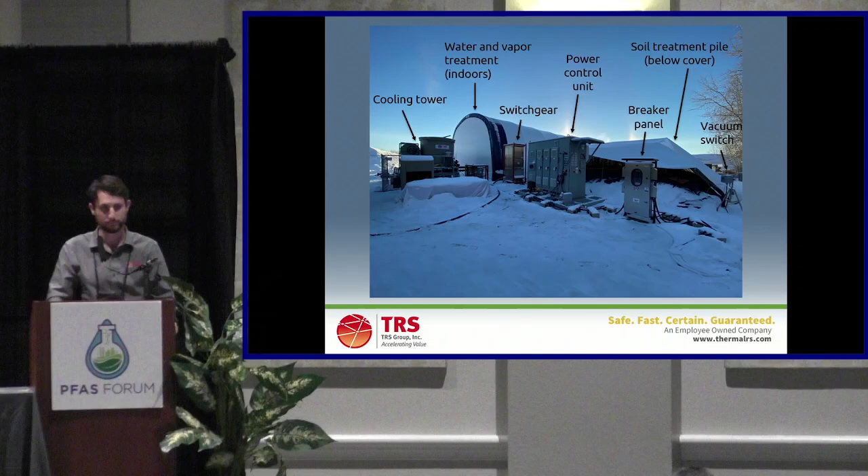The first thing that the very hot vapors enter when they leave the pile is a wet scrubber, where the hot vapors will go up through the scrubber while processed water will rain down. That will help cool the vapors and also, as much as we can, take PFAS from the vapor phase and bring it into the liquid phase, which is beneficial to reduce the amount of solid waste that we have at the end of our project.

Those vapors will continue up to a condenser, where a cooling unit in conjunction with the condenser are going to dry that vapor out further. The vapors will continue to vapor carbon, where they're treated and discharged. And then the liquids that are pulled from that will join the scrubber liquids and continue through our liquid treatment system.

We are currently using carbon for these systems, but they're plug and play. So we're really excited about some of the new technologies here and would be excited to partner with teams and have destructive technologies to completely remove our solid waste at the end of projects.

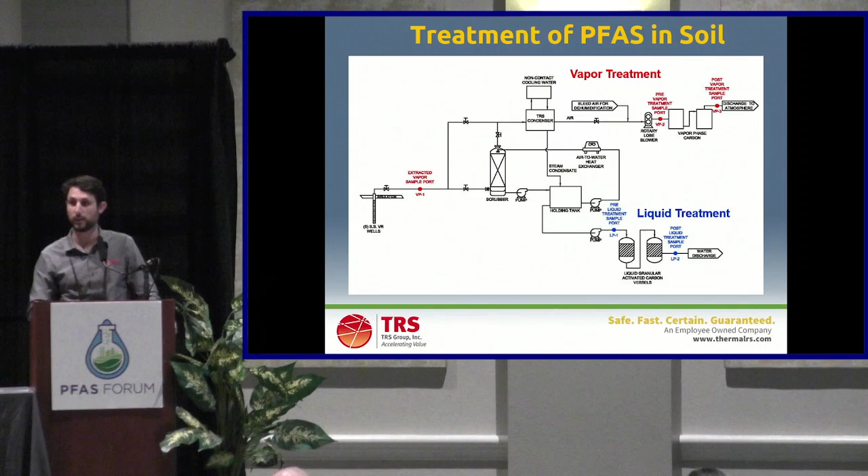So we operated into December up in Fairbanks, Alaska. A fun fact, because I wasn't there, was that we had the lowest temperatures ever on site of negative 40 degrees Celsius. That was the temperature in Fairbanks. At the same time, we reached the highest soil temperature we'd ever done at TRS of 400 degrees Celsius. So even in the coolest temperatures, we're able to reach target temperatures.

We'd much prefer to do it here in Florida, but that's what we were working with. We built an equipment tent to manage some freezing. We were able to barely keep it above 35 degrees Fahrenheit, and along with some resistive heating wire, we were able to operate into December.

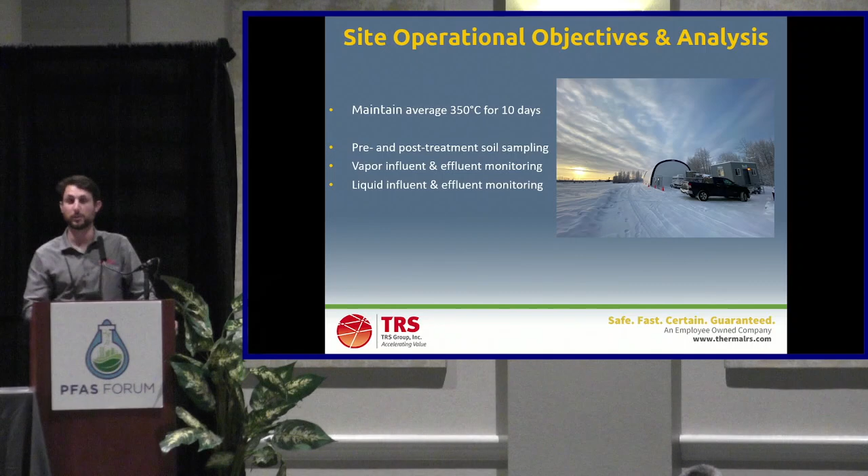So when we started our project, we had one main goal with the ESTCP, and that was to reach our target temperature of 350 Celsius for 10 days. At the same time, we wanted to gather data, so we were able to get pre and post treatment soil sample data for PFAS, and also measure our vapor influent and effluent along with our liquid influent and effluent to ensure our systems were discharging appropriate levels.

So this is a blow up of that right side, our actual soil temperatures. It's got an interesting shape, and there's 2 reasons for that. When we go to a job site and we're treating for PFAS, we'll start our heaters. They'll heat the soil up, the groundwater up, or soil moisture up, and we'll reach 100 degrees Celsius. Once we reach that, all of that energy we're putting into the soil is actually going towards boiling off the water, because we cannot get over 100 degrees Celsius until all of that water is gone.

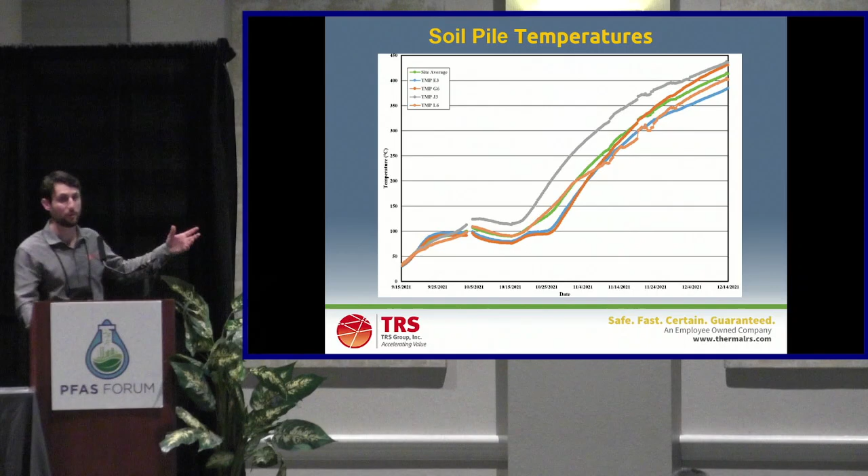Another issue we had on this site, a real world issue, was a power outage for several days, which caused a couple issues with our heaters, so that was another great lesson learned that we were able to draw from this project. Once we're able to remove all of that water, we have rapid heat up all the way to our target temperatures.

So let's look at some data. We have data for PFOS. In red is our pre-concentrations and in blue is our post. We had really great reductions, PFOS down to 4.1 micrograms per kilogram. PFOA was non-detect. But there's one piece of data that was the most helpful for us on this project, and

that was at E3, which is 5 from the left here. You can see we didn't have the reductions we were looking for. That coincidentally was the only location, the only temperature sensor that did not reach our target of 350 degrees for 10 days.

And that information is invaluable to us because of a couple of reasons. The main one though is we know that we are targeting the right temperature. We are not using excess energy, we are not being wasteful, we're being very efficient in how we're operating our sites. So we were really happy to be able to gather that data here.

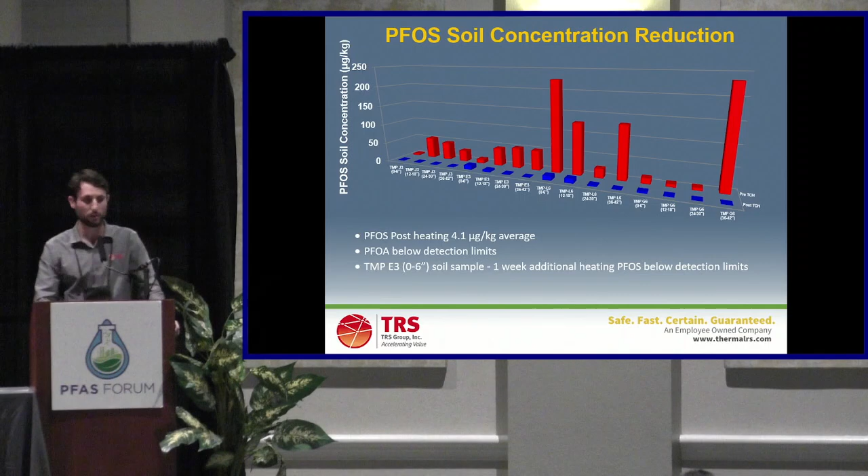So our ex-situ project in Eielson told us we could get significant PFAS reductions when we were able to reach temperature down to non-detect or near. We were able to achieve our surface water discharge criteria, and then had that one lesson learned about electricity source and making sure that was reliable.

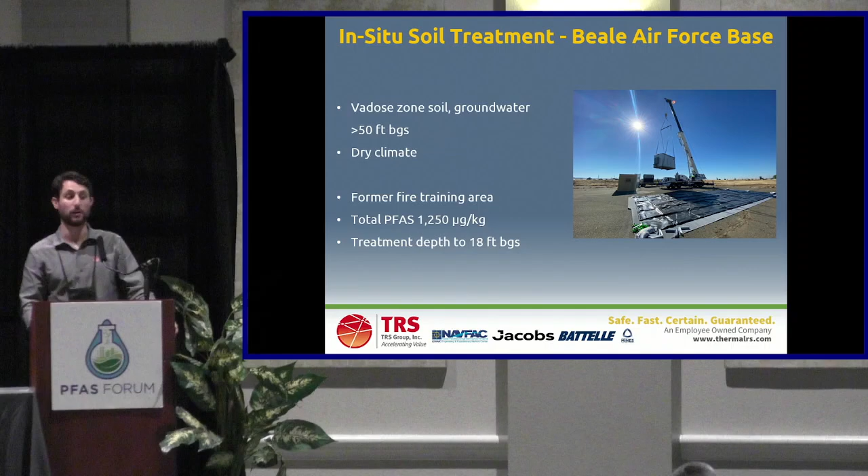So we'll talk a little bit about our in-situ soil project at Beale Air Force Base, which is just north of Sacramento, California. Chosen for its dry climate and the fact that the site was fully in the vadose zone. When we are treating in situ, we are not able to treat in the saturated zone. The vadose zone is where we can avoid having to heat up all of that water that's in the saturated zone - our technology is not the best for that. Much higher concentrations here at Beale, up to over 1,000 micrograms per kilogram at some of the hot spots.

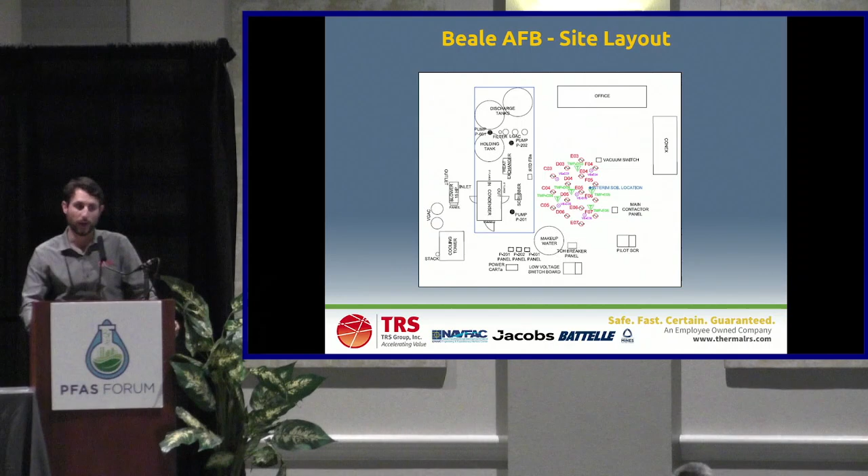The equipment that we use for in situ is virtually the same as ex situ. A lot of this equipment was actually brought down from Fairbanks, Alaska directly to Beale Air Force Base to be used. One difference we do have here is a different type of insulation - here we have an aerated concrete. Aerated concrete is great because we're able to pour it, cast it. The air in the concrete is a great insulator, and we have a nice solid platform upon which we can work and sample.

One other thing I'll point out here is our scrubber, which is towering in the middle of the job site. That's the first bit of equipment the hot vapors will hit, where it will go up while the process water will come down.

We had some temperature sensors that did not reach temperature, and we actually had one of the rainiest seasons on record in Sacramento. So surface water was affecting our temperatures by getting into our treatment volume, and all that energy required to boil off that water kept us cooler than we were hoping to be.

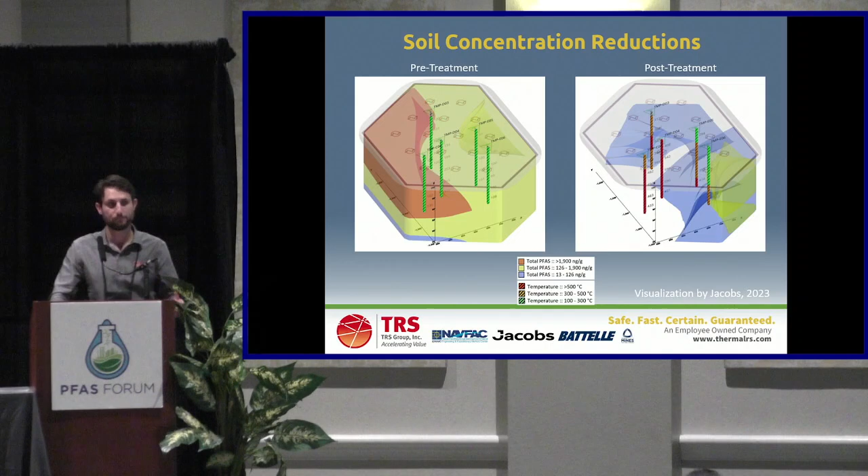You can see that represented in our data. You can see, over very high input concentrations on some of these soil samples, down to very, very low levels of concentration. PFOA, 0.07 micrograms per kilogram, and PFOS, 1.75, specifically where we were able to reach 350 degrees for 7 days.

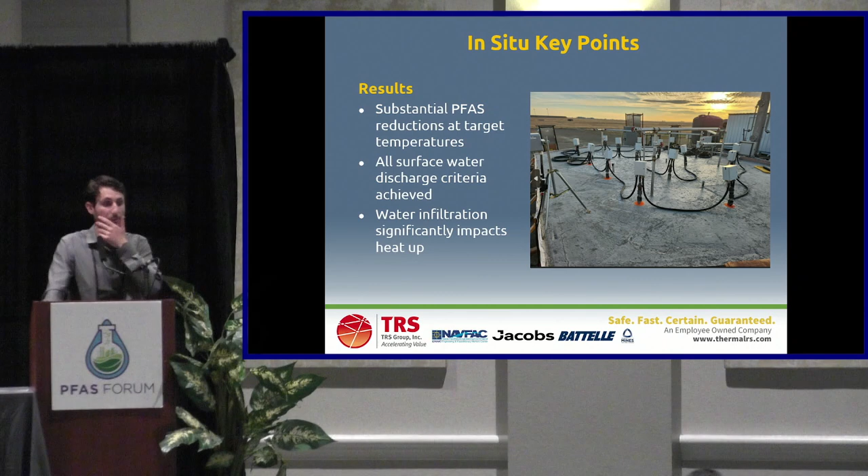Even at the zones where we didn't reach our target temperatures, we still had reductions, but something of a lesson learned for us. Water infiltration was a big lesson learned. In the future, we can install things like surface drains, we can pave the site to manage surface water infiltration. But we also had very good reductions where we reached target temperatures and also reached all of our surface water criteria.

So this is Anchorage, Alaska. I was just on this site last week, and we are currently ready to go, waiting for a couple last approvals. Much larger site, 2,000 cubic yards. You can see this tent is a reusable tent built on shipping containers. So we can move this around to different locations to treat PFAS soil on site and avoid having to transport it. So excited to talk about the results from this project soon.

So a little bit on site selection. Here in Florida, you're likely going to want to do ex situ just because of the shallow water table. Ex situ is going to be better for soil that you can easily excavate and things that are shallower. In other locations, in situ is going to be good at treating deeper impacts, but it is only good for the vadose zone. Insulation is needed for both methods of treatment, and our ex situ is going to use horizontal heaters, which allows us to use less material.

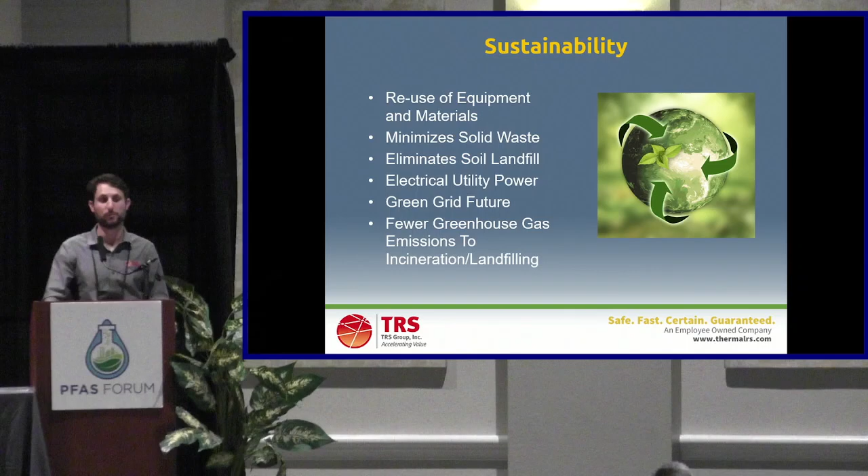Just to warn you, I have 30 minutes worth of questions in front of me. You don't want me to ask mine, so... The bar will not open unless we have 3 questions.

Hi, I have a question for Trevor. This is Lauren March with Arcadis. You mentioned that SCWO has some sensitivity to salts, and you've developed some IP that manages that problem. I was wondering if you could expand on what that IP looks like and what approximate salt content allows you to accept as far as feedstock wastes.

Yeah, it's a great question. I won't be able to expand a lot on it because some of it is know-how, not protected. But really this is about understanding what those different salts are and at what different points salts would drop out. So we look at different technologies either to remove salts or we look at how things go through our system to be able to drop them out in a way that is controllable and maintainable by us to get continuous operation.